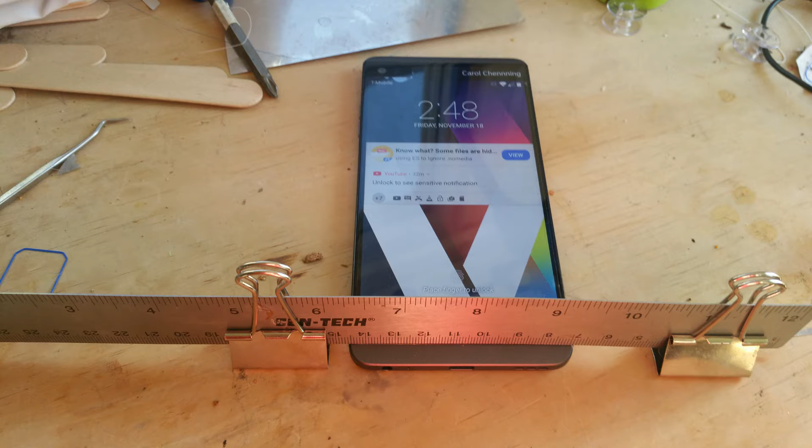The first thing you want to do is take a good profile picture of the phone. I also included a ruler, which will help with scaling this picture.

Here's a new file. Let me turn on the origin, and the next thing you're going to do is select canvas. The canvas is a photograph of the profile of your phone. I need to select the face to put the canvas on, so I'm going to select this face.

Next, I'm going to go to the file system and select the image. This is my image. Let's click OK. Now I'm going to look at the canvas straight on, like this.

Next thing I'm going to do is calibrate the canvas so that it's the right size. Outside the phone's outline I also have a ruler, so that makes it easy to calibrate. Click on canvas calibrate.

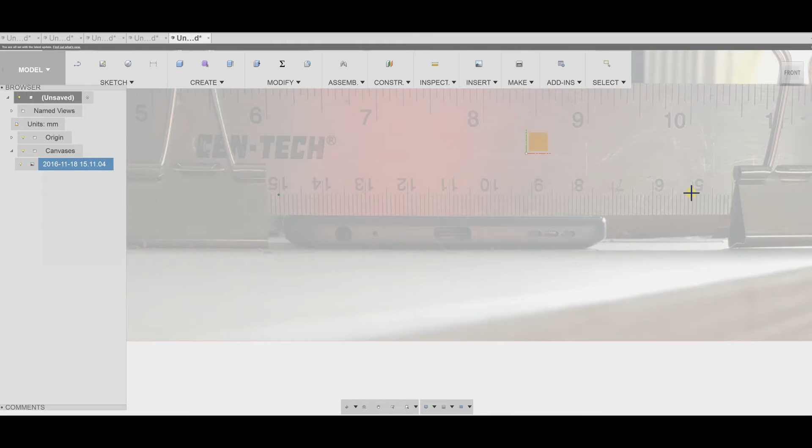I'm going to select 15 and 5. So I know this is 100 millimeters. I'll type 100, and this should be scaled correctly now.

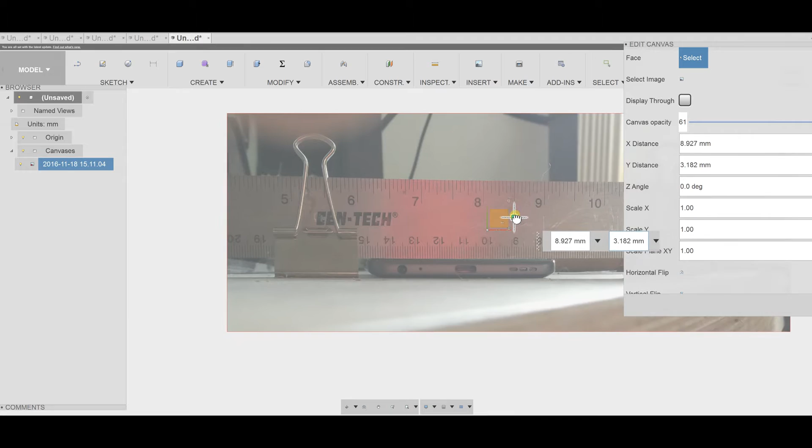Next I'm going to try to center it, just so it's easy to model. Go to edit canvas. Now I can move it like so. There, now I have a canvas.

I can sketch a curve to fit the picture. So let me go to sketch, and sketch out on the same surface of the canvas. Let me start with making an outline of the phone stand. Roughly about this big, roughly.

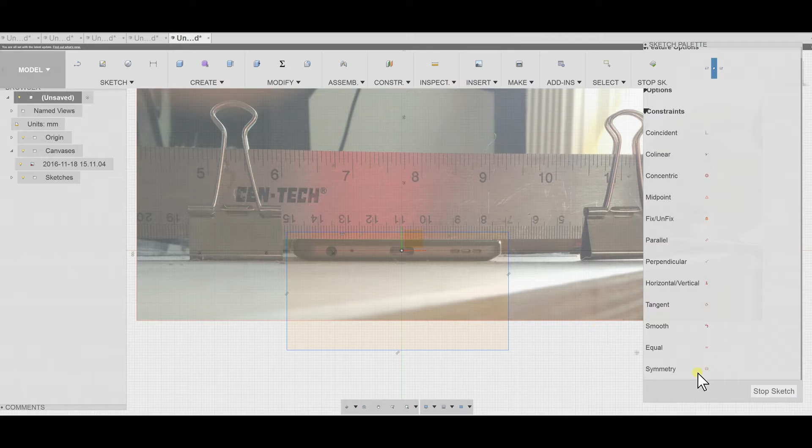Next, I'm going to make sure it's symmetrical to the y-axis. First, I'm going to project the axis so I can use it. I'm going to project this axis. You can see it turns purple.

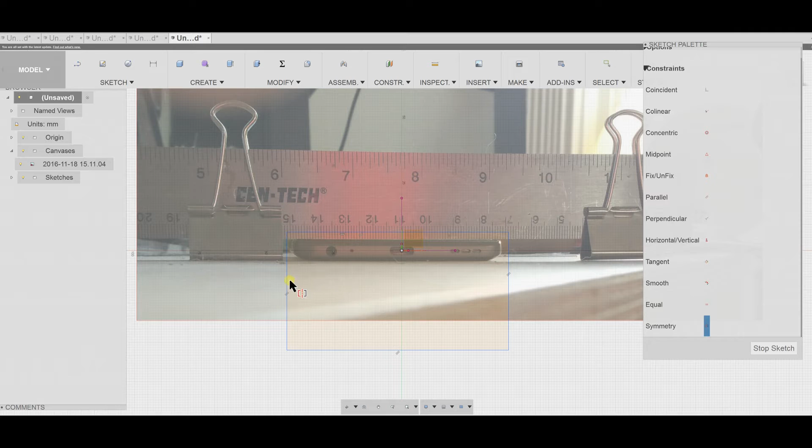Next, I'm going to select symmetry and do a symmetry constraint. The first line for symmetry, then the second line for symmetry, and the third thing you click is the mirror line. So the mirror line here. Now it should be symmetrical.

You can see the canvas is a little off, so I'm going to adjust it again. I think partly it's because of that. I'll click escape to exit the symmetry constraint, and edit the canvas just to center it a little better.

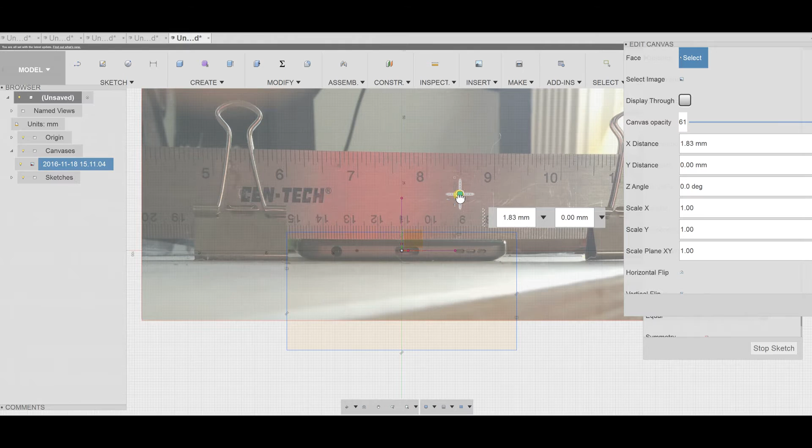Like maybe this. Okay, let's see. It looks like I also need to adjust the Z angle a little bit.

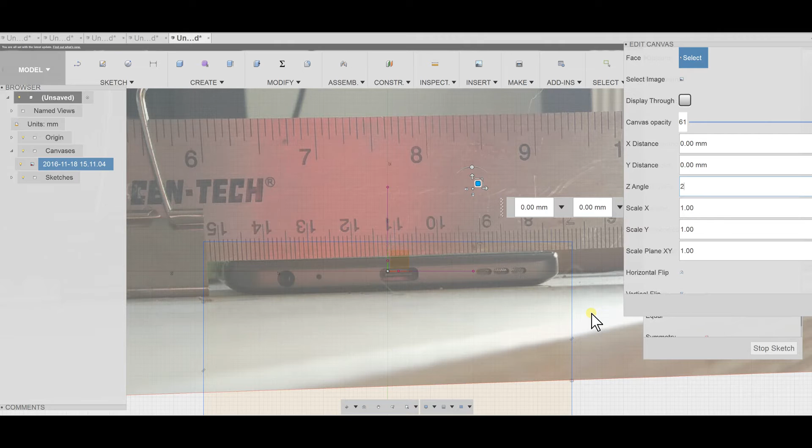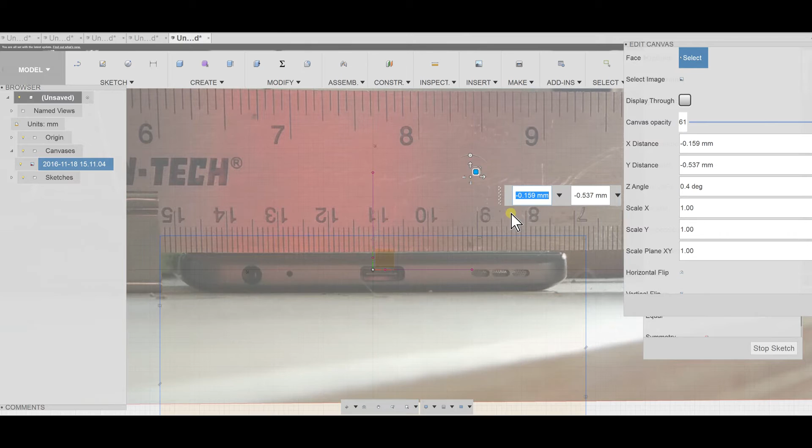Let me try 2 degrees... 0.4... no. Let me see if I can put this line here, that makes it a better reference. Yeah, this is better. So I am going to do this, just to make sure it kind of matches. Okay, I hope this is okay.

Back to sketches. I'm going to sketch two lines: one fitting the face of the phone here, the next fitting the back of the phone, like so.

These two are parallel, and I'm going to try to fit them to the phone's surface. They look kind of okay.

Next, I'm going to sketch this curve profile, and for that I'm going to use a spline. For spline, you want to have as few control points as possible.

Let me just try to sketch a control point, something like this. Next I'm going to do minor adjustments to adjust the curvature. I use this little handle, and as you know, the sharper the edge, the larger the curvature.

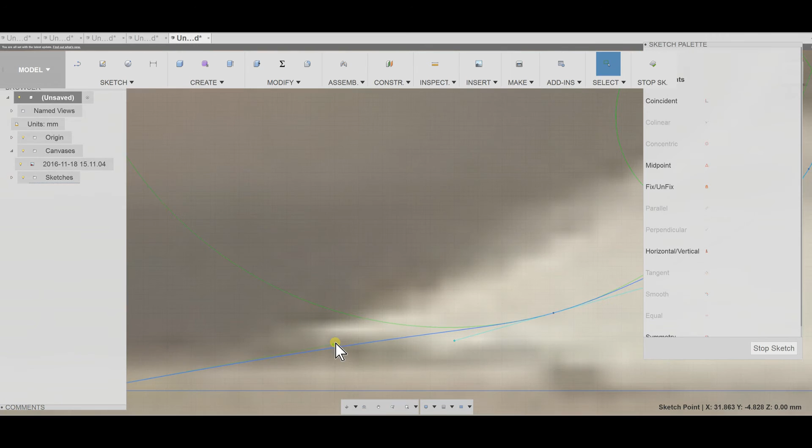Generally, you want this line, this handle, to be on the line itself, and actually this is...

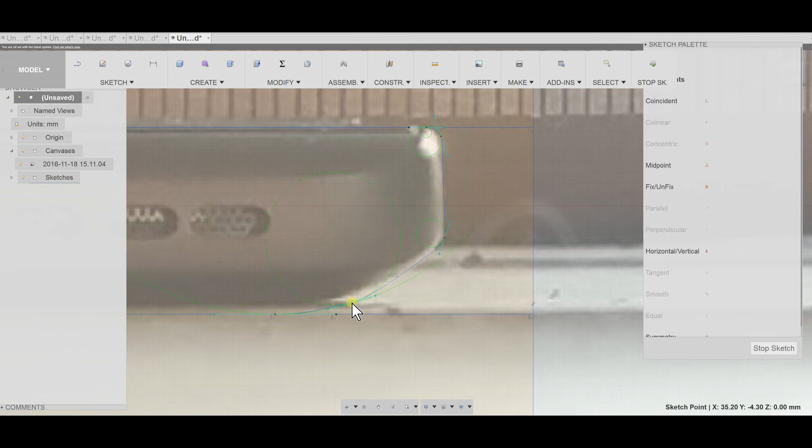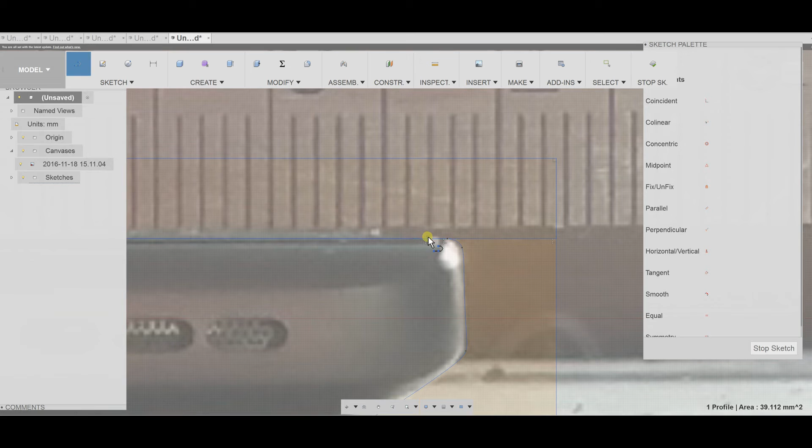So I traced the outline of the profile, and next I'm going to have a little notch, a little arm, a little extrusion to hold at the edge of the phone. Make sure you try not to block the screen of the phone, so you can still use it.

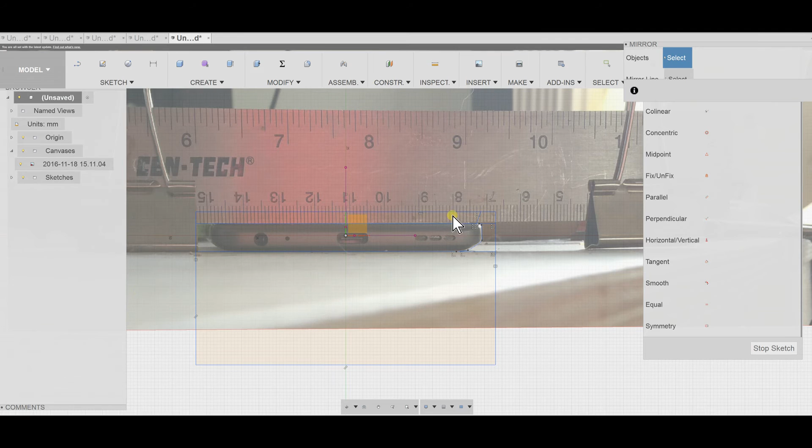So I'm going to do a line here, and next I'm going to do a symmetry again - I'm going to do a mirror, using the profile I already sketched.

And the mirror line is this, the y-axis.

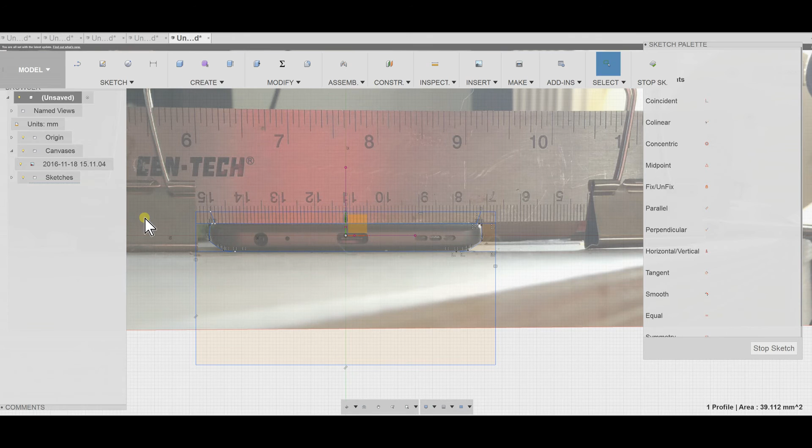So now I have a profile, and let me turn off the canvas and see how it looks - turn off the visibility of canvases so I can look at it and see if it looks right to me.

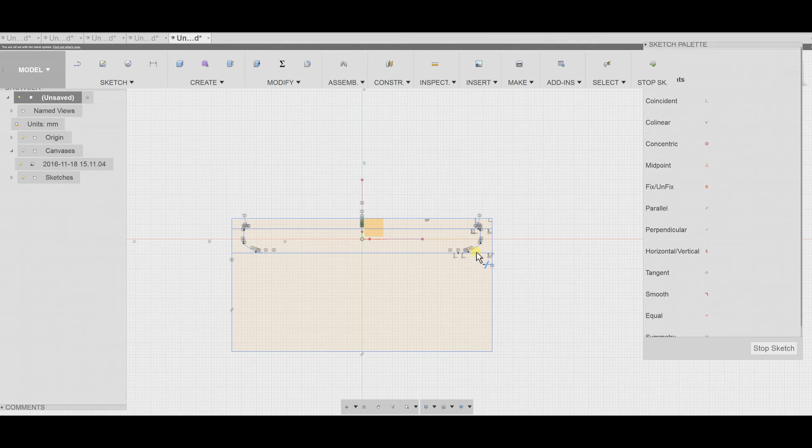Now next I'm going to trim these excess lines that I don't need, just so it doesn't look too confusing. So I'm going to trim this line, this line, this line, here, here, here, here.

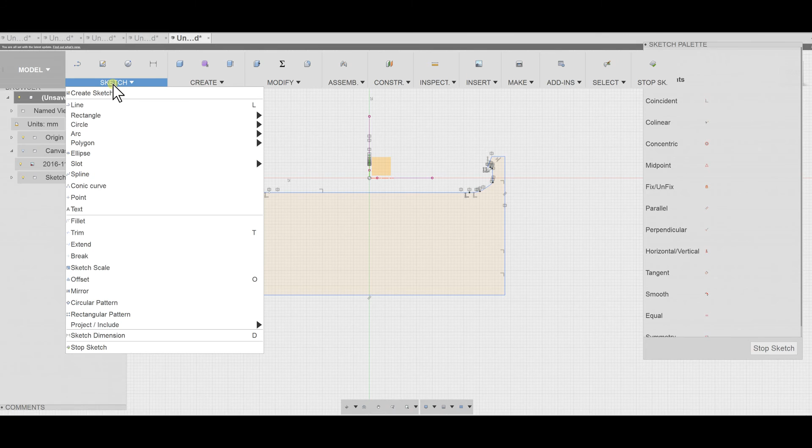So this is basically our extrusion. Usually what I want to do is save some material, so I want to do another rectangle - let me do another 3-point rectangle as a carve out, just a carve out. Like so, and do some minor adjustment.

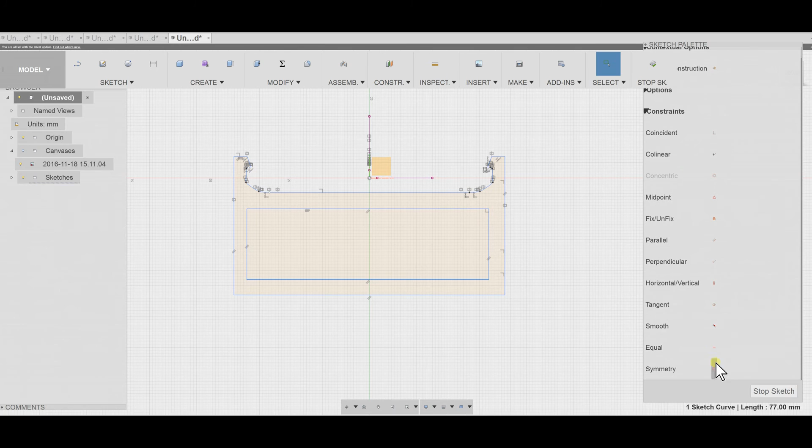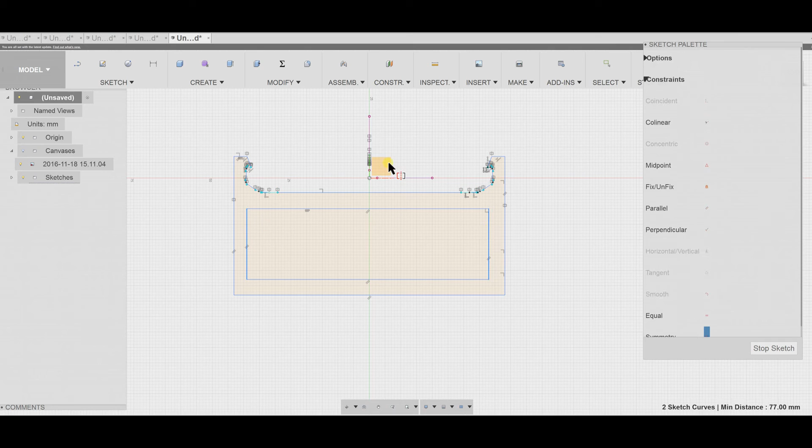I am going to try to do symmetry again - first edge here, second edge here, and a symmetry line here. Wait, let me try this again: first edge, select symmetry, first edge here, second edge here, and the symmetry mirror line is here. You can see the constraints are here.

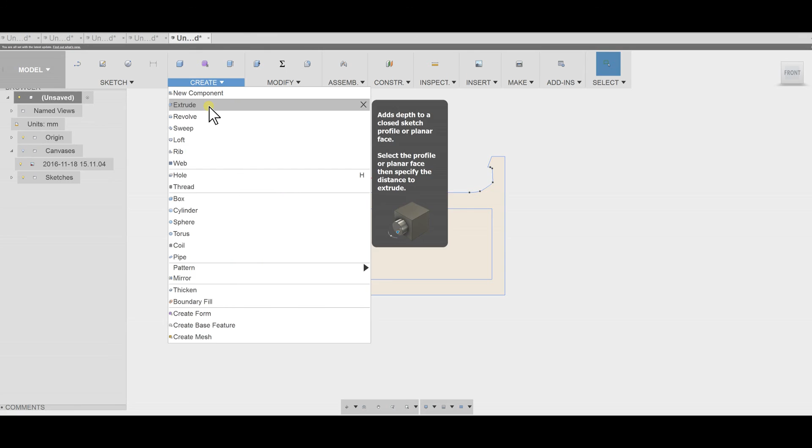So now we're ready for extrusion, and basically just want to extrude this. So stop the sketch - we're back to modeling and create an extrusion with this profile, right?

You can see that basically we can just make the extrusion, and usually I want it a little thinner, so I make it about 4mm thin so I can easily carry it with me in my pocket.

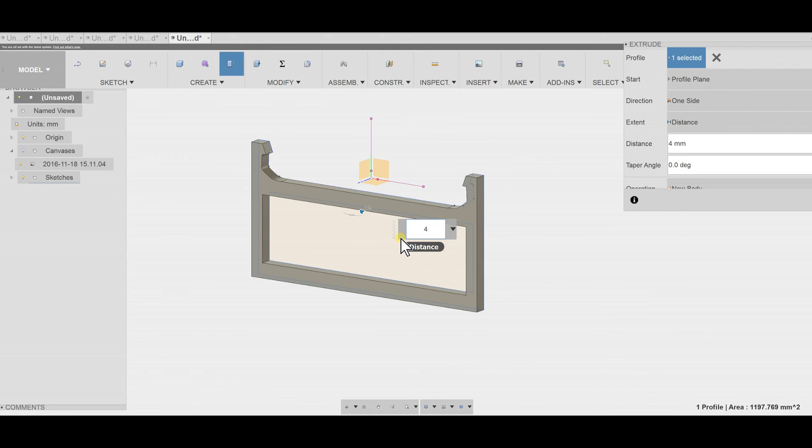So this is basically your first body, and you can save it by right clicking on the body and saving as STL, and then you're ready to print it. That's how you trace a profile of a phone to make a slim stand that fits the phone.

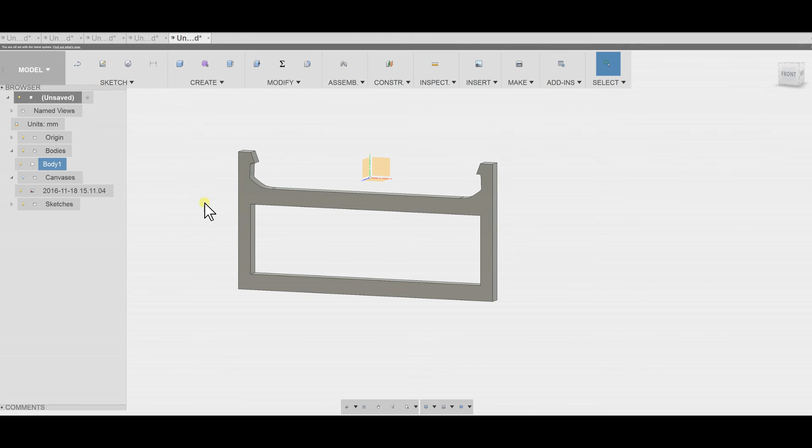The next thing is to 3D print the model and see if it fits. If it doesn't fit, go back to the sketch to adjust it. The finished product should be snug, and you should be able to adjust the angle. It should be thin, so you should be able to put it in a pocket pretty easily. Happy printing!